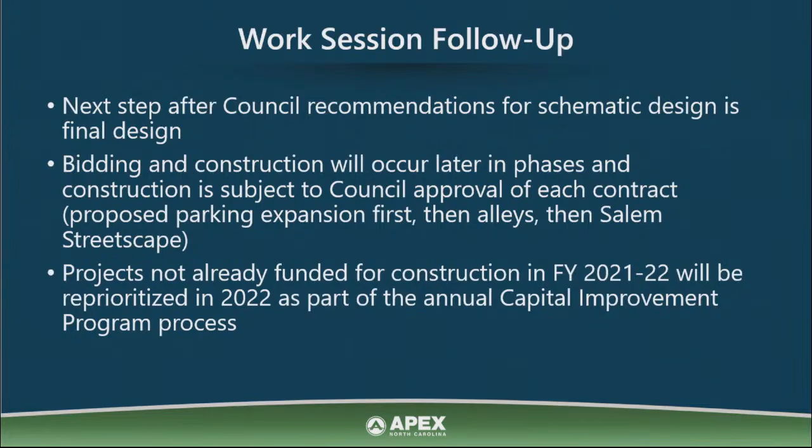Based on the town lots, the marked on-street spaces, and the alley upgrades, in total we're showing a net increase of 201 non-handicap accessible spaces and an increase in 13 handicap spaces with all of our plans.

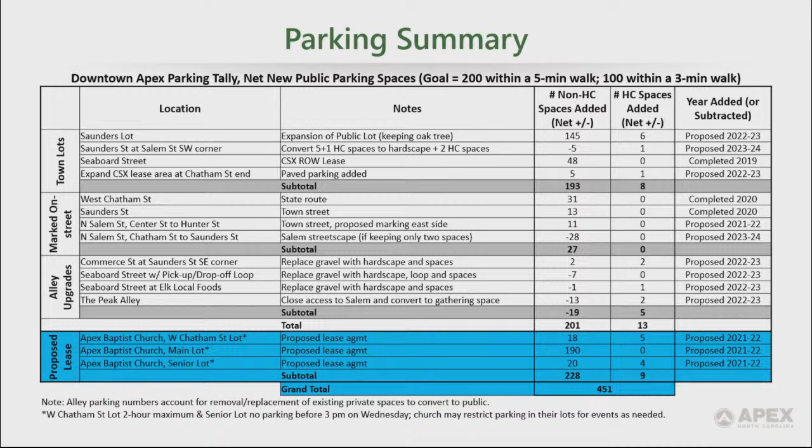At the bottom, I've highlighted a proposed lease with the Apex Baptist Church that is being discussed. The church has allowed public parking on their lots in the past, but they are not signed officially as a public lot, and we don't have a lease with the church. If we are able to establish a lease for some of their parking areas, we would be able to sign those as public parking with certain restrictions determined by the lease. So we're continuing to try to get that formalized as a signed public lot, but that is still in discussion.

There is a solar canopy that we looked at. We recommended excluding that from the project. However, there is a separate presentation tonight that will discuss the solar canopy because there were questions from council. We, as the design team, made that recommendation based on the information we had, looking at the cost within the scope of the downtown plan and what our priorities and goals were. If the information presented tonight to council makes sense as a larger goal for the town as a whole for this area, then that's something to take into consideration that would have been outside the scope of what we were looking at.

So I don't want it to look like staff is contradicting one group versus the other in terms of our recommendation. Commerce Street, we recommended proceeding with that.

Also recommended including the utility relocation underground, making sure the conduits are there for that. Seaboard Street, we recommended proceeding with that design and relocating utilities, providing those conduits.

We recommended a lease for compactors on Seaboard Street, but to be clear, we'd have compactors either way. We're just recommending exploring a lease option versus purchase.

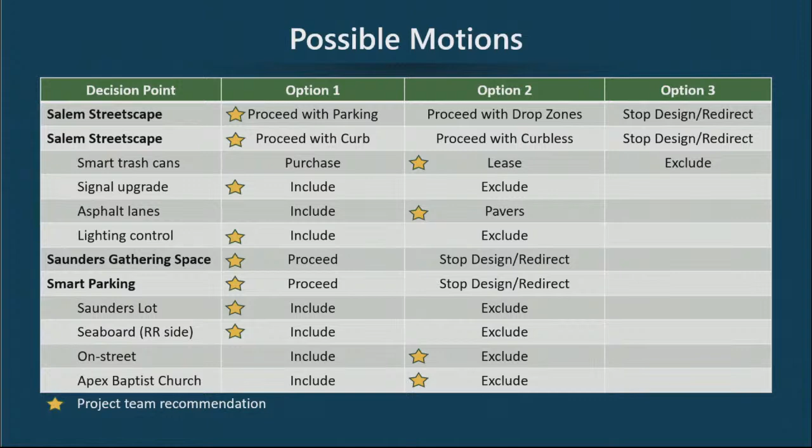As far as the smart parking goes, we recommended proceeding with that, including both the Saunders lot and the Seaboard Railroad strip of parking, but not including on-street spaces and not including the Baptist Church lease if that moves forward, in terms of the smart parking discussion.

So I'll go through the schematic designs really quickly. This is the list.

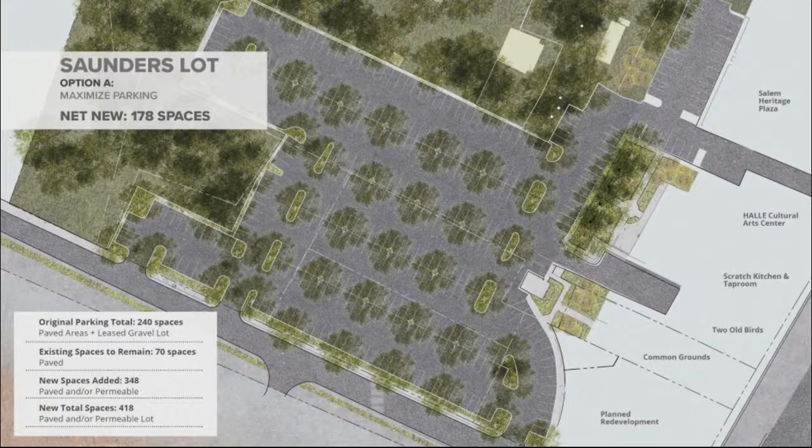First of all, we have two options for the Saunders lot, as you may remember. We showed you an option with a net new 178 spaces, and then that would be compared to an option that, as I've highlighted here, keeps the green space, the large oak tree. That would be 27 less net new spaces than in option A.

At the council work session, I believe there was a motion that may have been approved for the option with the green space, and that's fine if that's how you'd want to proceed. If you want to discuss that again tonight, we can discuss that again after the public hearing.

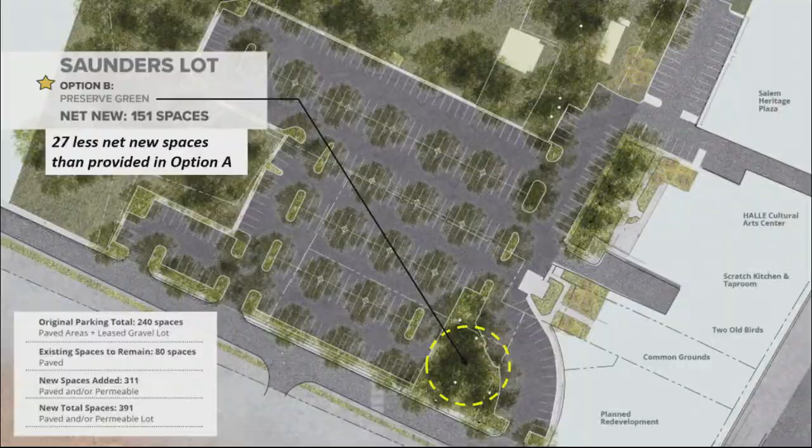As far as the recommendations go, the preserve green option is slightly cheaper than the maximized parking option. We are currently talking with property owners. There are two lots included in that parking expansion, so that's why we say cost to be determined, since that's under negotiation at this time.

The solar canopy has gone up in cost since the last quote we got. Steel has jumped up in price over the past month or so, so there's a new number on that. Steel could certainly go back down. There are a lot of factors in construction until you bid a project that can drive a project cost up or down. And there will be a presentation later to explain the return on that investment and other benefits of that solar canopy.

The original CIP allocation, just to recap, was $1.2 million for the parking expansion.

This also includes improvement of the pavement on Commerce Street and some drainage improvements as well. So it would require acquisition of right-of-way across the back of those businesses to be able to do those improvements on Commerce Street, and also acquisition for this improvement for parking and pedestrian hardscape in the area.

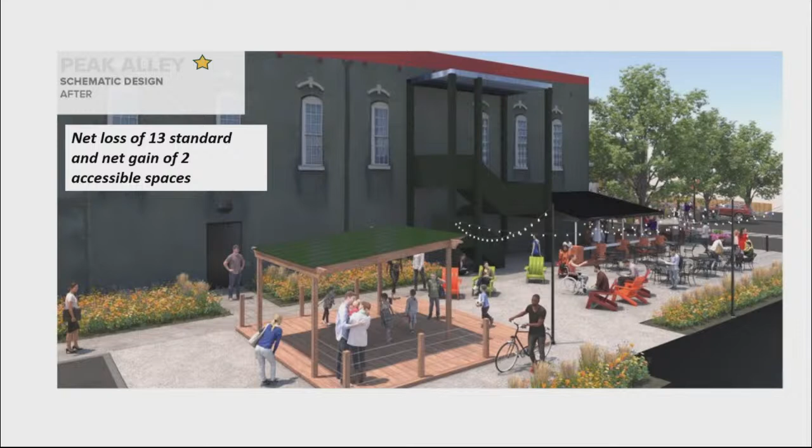There are 2 accessible spaces at the back side on the Seaboard side from this, which are just off the image. But you can see a small stage set up and areas for people to dine, and that would be the intent of this area. There is a net loss of 13 standard type spaces, but a net gain of 2 accessible spaces in that area. So that's the trade-off with this design.

Construction for Peak on Salem is $91,000, with about $44,000 in right-of-way and easements for that area. Again, that contributes to the grand total for the alleyways.

We also looked at an option that kept more of the parking spaces. Instead of just one pickup drop-off zone on each side of the street, this retains 10 out of the 30 spaces. We were able to keep the catenary lighting with some adjustments and adjust the street furniture layout. We lose 3 of the street trees with this, but we made sure to include at least one street tree on each side of the street in every case, so there's no gap—you've either got trees on both sides or one side with this parking arrangement. We didn't feel we could add back any more parking without taking away from the goals of the streetscape, but we feel this is a good balance to keeping some of the parking.

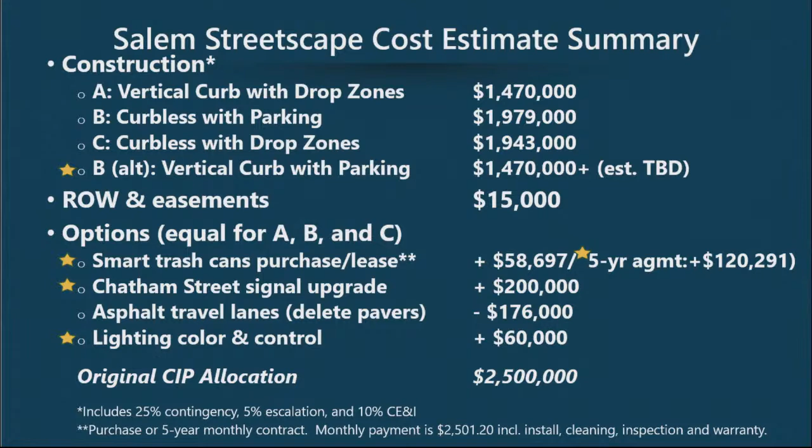We do recommend smart trash cans. We looked at purchase versus lease options—buying would add about $59,000, versus a 5-year agreement adding about $120,000 on top of our decorative cans, which would help with operation and maintenance by having a contractor handle a lot of that. Again, the Chatham Street signal upgrade adds $200,000. We recommend the pavers—good for both stormwater and aesthetics, and they have a calming effect on traffic. So we would not recommend asphalt lanes; we'd recommend the pavers and the lighting, color, and control I talked about. The original CIP allocation was $2.5 million, so we're doing a little better on our estimate here than we were on the alleys.

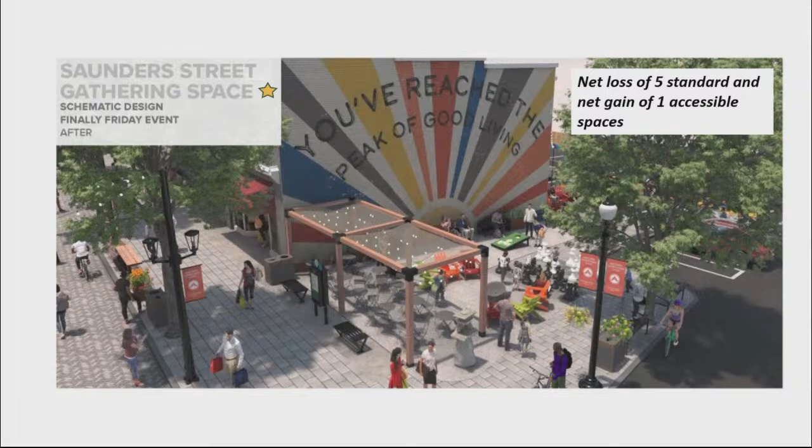This is the Saunders Street gathering space that we recommend. This shows taking the existing row of parking and the garden and trees there now, converting that to pedestrian hardscape, removing most of that parking but keeping 2 accessible spaces. That's a net loss of 5 standard spaces, but a gain of 1 extra accessible space. Construction of the Saunders gathering area would be $202,000. We don't anticipate significant cost in right-of-way easements with that since it's town property.

There wasn't a separate CIP allocation identified, so we would propose this to be an add-on to the Salem Streetscape. It could be constructed with Commerce Street, or it could come in with Seaboard Street. We'd have to figure out construction phasing and budget purposes, like where that fits.

Now onto smart parking. We do recommend smart parking for the Saunders and Seaboard with railroad side only. Smart parking is basically monitoring systems with cameras and loops. You can have a sign that tells you how many spaces are available, or have the information pushed to the cloud and an app to tell people coming downtown how many spaces are available. We don't think that makes sense for on-street spaces, but we do think it makes sense for off-street spaces if council decides to move forward with that.

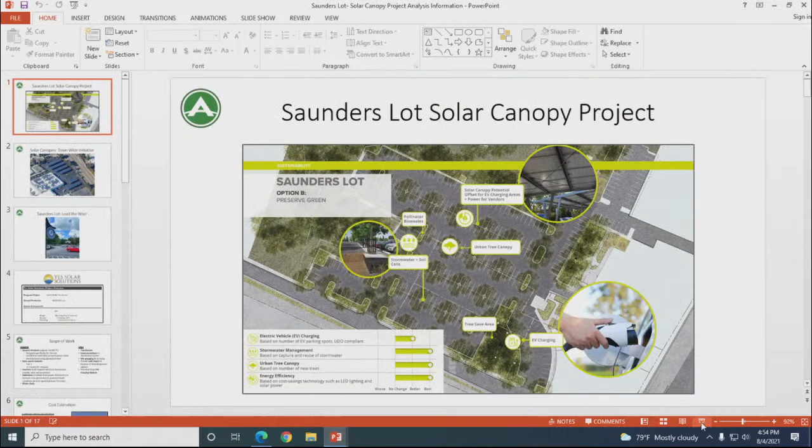So at this point, before we go into public comments, I want to turn it over to sustainability staff, and they're going to talk about our solar canopy. I will bring up that presentation. Thanks.

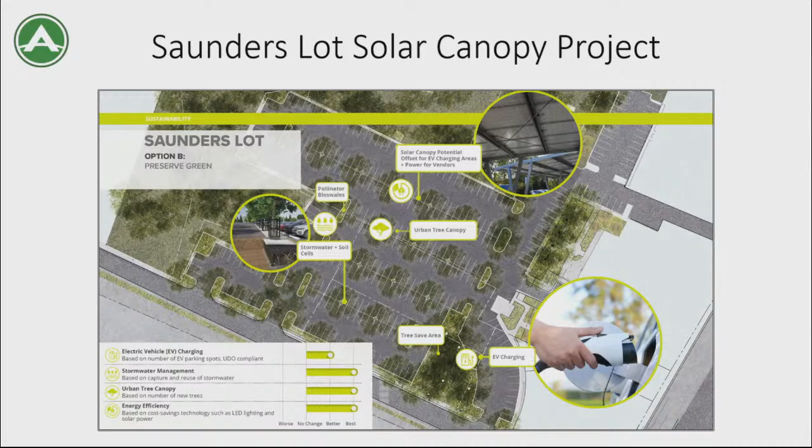Like I said, it's a townwide initiative, and the Saunders lot is a good opportunity to lead the way. It would be great because the public would benefit from it, since it provides shaded parking and helps reduce the heat island effect by creating shade.

This is one of the proposals that we've gotten, so this is where we're starting with the cost estimates. It would be a project that produces about 814,000 kilowatt hours per year, and that would be with 588 solar panels.

This is how we would maximize the benefit. It's a bit of a larger project because it's upwards of 500 panels, but we maximize the benefit that way, because the larger the project, the less expensive it is per unit, similar to buying in bulk, if that makes sense.

With the scope of the work that we would be getting with this, the vendor would be covering the cost of the carport structure, the solar panel modules, the inverters, the optimizers, and the shade study, all of which I can explain further as needed. The Apex electric team specifically would be responsible for the transformers, the interconnections to the distribution system, the site preparation, and the potential future EV charging stations.

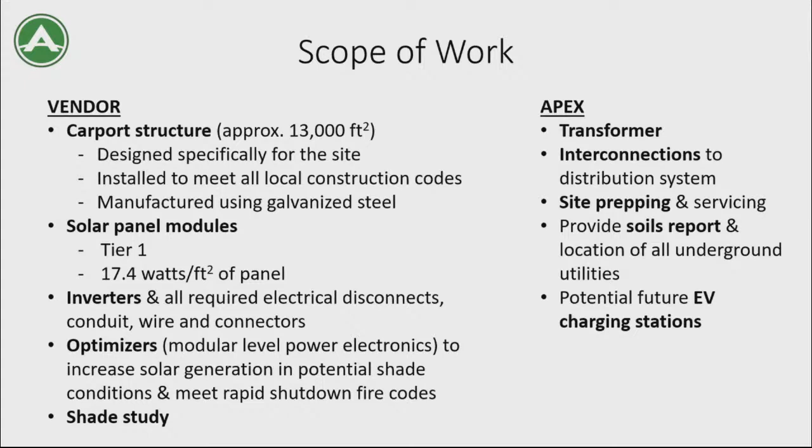These are more details on the cost estimation. Like was stated earlier, the estimate before was about $760,000. Now it's about $910,000, simply because there's a lot of fluctuation with steel prices right now. And this price also doesn't include the percent of contingency that is often included in projects.

There's also, with this cost, a warranty covering virtually all aspects of the project, including the steel structure itself, which has a warranty of 10 years, the solar panels, which would have a warranty of 25 years, and the inverter, which would have a warranty of about 10 to 12 years. That's not saying they need to be replaced in those times by any means, although solar panels do have a lifeline of about 25 years. But if something were to happen with them because of weather or similar events, then we would have a warranty on that.

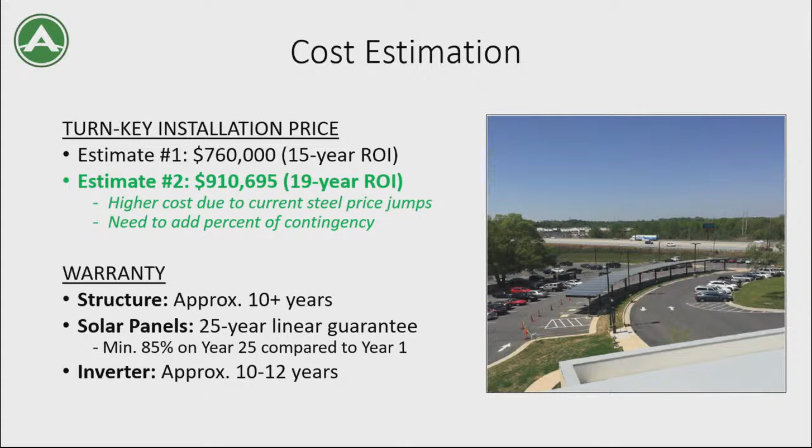Given the project and what kind of solar capacity we would be getting from it, we would have a total annual savings of about $50,000 with our energy costs.

Again, to people who aren't involved with solar, this is a bit overwhelming. It was to me at first, so I can explain that further as needed. But the big takeaway from this slide is that our total annual savings would be about $50,000 with this project. That makes the total payback about 19 years, since the project is about $930,000.

And that was calculated just given the 588 solar panels, peak demand, the price of our electric rates and things like that. So, in summary, the estimated cost is approximately $910,000, with savings of $50,000 every year on our electric, and the return on investment is about 19 years.

Some pros and cons: it is an added cost to the downtown design project, and there is the potential future use of another parking lot space down the road, because this is a 25-year investment. But the pros include shade for parking and events.

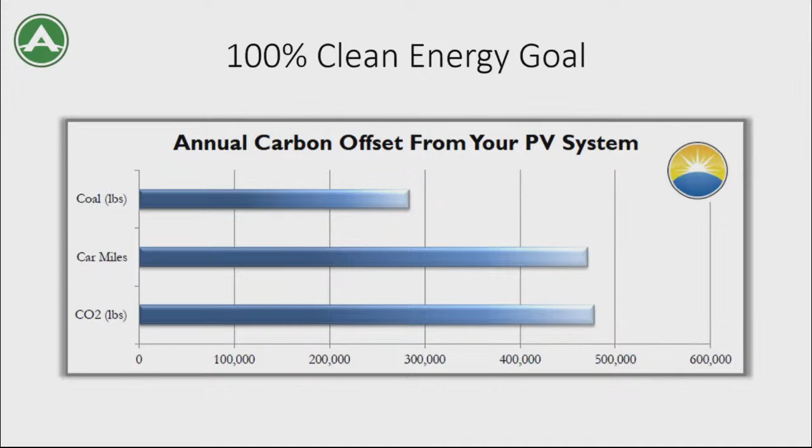This is a bar chart just kind of visualizing the annual carbon offset from the system. And more information: if about 1% of our energy resource is clean energy, then adding this proposed solar canopy is another 1% of our energy that will not be non-clean energy we're using. That is the same impact as planting 5,561 trees in Apex every year, if that's a better number to wrap your head around.

Additional considerations include funding for this. Megan and I, the sustainability program, would definitely look into other opportunities for funding, like grant resources. That would also be applied for research for EV charging infrastructure, and batteries for solar storage are optional and may be added in the future.

The summary, which I've gone over—I don't know if anyone has any, not questions, I guess, but in summary, that's the cost. Again, important to consider the steel price fluctuations and the grant opportunities we're considering here. The estimated annual savings gives a 19-year return on investment.

The future add-ons, the educational opportunities, and overall, the Apex Sustainability team recommends that we approve the solar canopy project because it's a big step to help meet the 100% clean energy goal. It's meeting the increasing demand for public EV infrastructure.

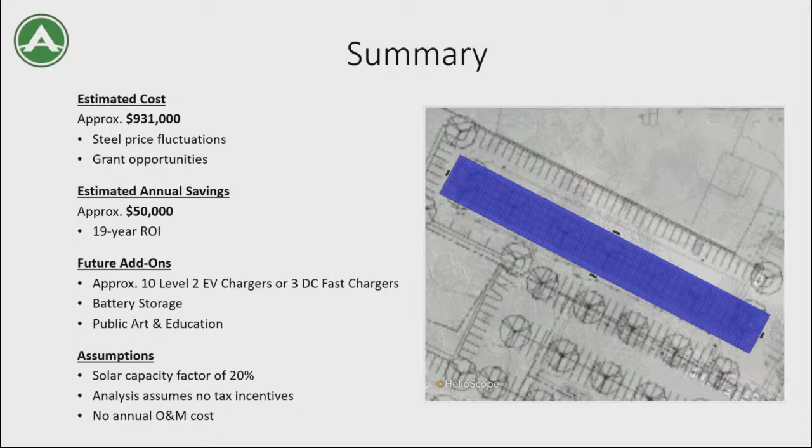And I would hope that a parking deck is further out than 10 or 15 years if we're going to spend all this money right now on this parking lot. If it's only 10 years out, let's do a deck right now, right? Well, that's just my question. It's important to be cognizant of long-range planning, because I think that's what we're all trying to do.

Yeah, and I had one other question. Part of the discussion last time concerned getting multiple bids from different vendors. Unless we still only have one bid here, are there not multiple vendors that provide this, and we're stuck with these guys, or what's the situation there? There are multiple vendors. Before moving fully with the project we'd have to send out an RFP anyway. The prices here are just from one vendor, and also from conversations we've had with our ElectriCities representative, if that makes sense.

Okay, so if I could paraphrase what you're saying: we'll do an RFP, and there will of course be multiple vendors and bids at that time. Yes. But we feel like this one bid is kind of representative of what we're going to see, because of steel prices or. Correct, correct. And when speaking with vendors, a lot of them aren't super willing to give out full prices on what they think a project would be, just because of the competition there. So these are the best numbers we could get based on what someone was willing to provide.

There was also conversation last time about where the power from this would go. Has there been more discussion with staff on that? Yes. So if there are future EV chargers, then the solar canopy would be providing the energy for those. Otherwise, it would go back to the grid, the town electric grid. If that answers your question.

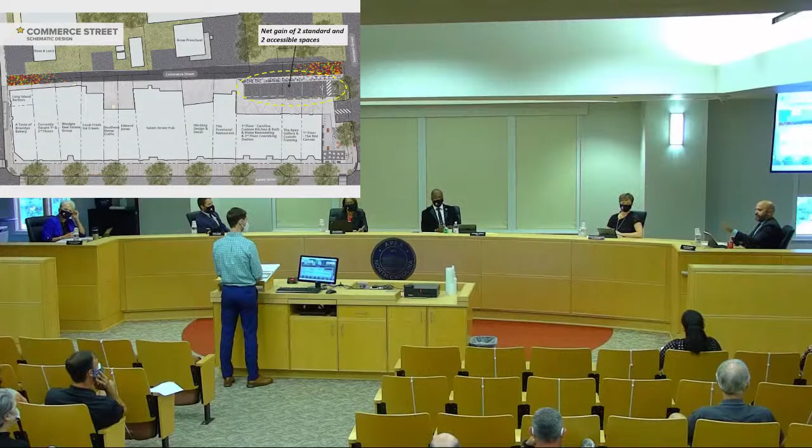That's what this meeting is, to say we're starting this process now. After this is when all the acquisition happens. So just recognize, I think you had a page earlier that showed 5 phases, and we're at the end of phase 1.

We did the study, now we're doing phase 2 where we're actually starting the thing. There's going to be a lot more of these meetings, I would think. The decisions we make tonight probably realistically aren't going to be 100% exactly what happens, because stuff will come up in design, stuff will come up in implementation. We'll have to come back and make changes, that's what happens. So we're at the very start of this, and I ask everyone to keep that in mind.

And I think that comes down to some of the details too. I feel like some of the discussions we're having and the questions we're asking, they speak to what the next step is going to be. Like, we're going to do final design where we narrow down all the details. So it's okay to not know exactly where a trash compactor is going to go. We need to, the purpose tonight is to get something down on paper officially, as this is where we want to go as a town.

And I also want to speak to the zone parking thing, and I just want to echo what our lawyer said. We're a public entity, we're in the business of building public parking spots. Saying there should be zone parking means we shouldn't build a lot there, and the business or the owner that wants to do zone parking can buy the lot and do zone parking. I don't think we can do zone parking.

That's my opinion. And I would just like Ms. Hoey to investigate that and report back and give us more information. And it doesn't sound like she's prepared to do that tonight, so. I would say, I think we've done a lot of investigation, and we need to get something done on paper tonight. And if something comes up during the investigation, we got to switch plans. We got years before, we got at least 2 years before a shovel hits the pavement.

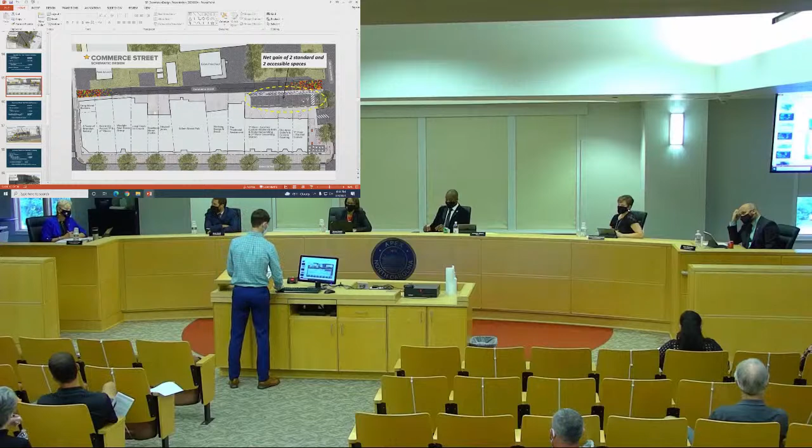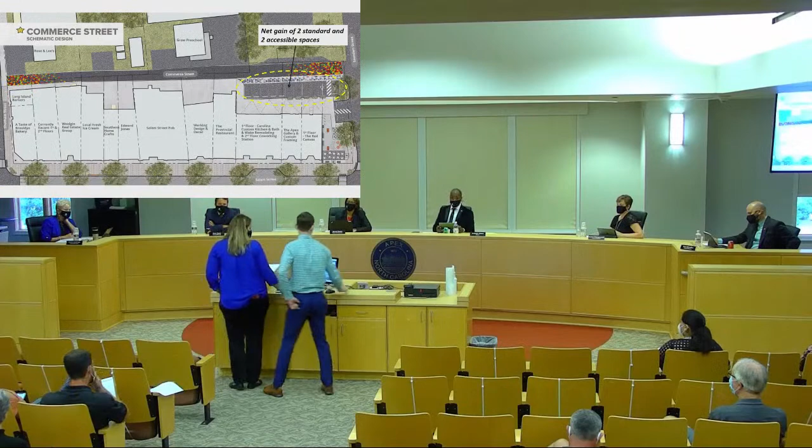Do you have an estimate of how many parking spaces that is for the owners that wouldn't be touched? Are you trying to? Sure. Okay, so I'm just going to use pointers here. So you're referring to like the areas behind these buildings?

Each of these, like for certain businesses like Edward Jones, Southern Home Crafts, these are like about 1 parking space per tenant that typically parks there. Salem Street Pub parks directly behind, they have a compact space, their dumpsters and stuff like that, so actually they park on this side. Grow Preschool has their parking lot to this side, we just don't indicate it. Those are all private spaces and they stay.

And there is space, we have this pull-off area here that is currently used for people to load and for truck deliveries, and all of that still stays, but it designates that space more officially, because you have a 20-foot drop here down to 15. So there are truck parking areas for loading and unloading behind Commerce Street. This is one of the reasons for the utility cleanup, because a lot of times we have trucks that come through this area when they're doing their deliveries, and those lines are pretty low and they take those out.

But all of these, with the exception of this end here, all of the existing parking spaces behind these businesses, like Werking Design Decor, have about 2 parking spaces. Provincial uses their rear, which isn't really indicated here if we had an aerial view. They have their garbage storage completely behind their building, so there actually is no parking there, it's just used for storage. So it all depends on each individual business, but all of those existing spaces where these people park, that all stays. Thank you.

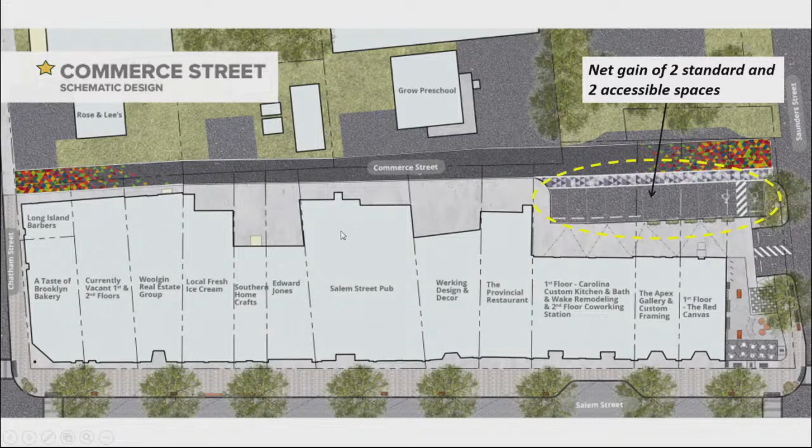Other questions or discussion? We have a motion and a second to proceed. Are we ready to vote? All right, all in favor indicate by saying aye. Aye. All opposed, no. All right, that passed unanimously.

And so the option to that was relocating utilities. Was relocating utilities part of that motion? Yes, that's correct. Okay, yes, excellent. So I will check that off.

So on Seaboard Street, our recommendation was to proceed with that design with the loop and the parking arrangement that we show as part of that. So again, I'm going to come back and ask the same kinds of questions. Okay.

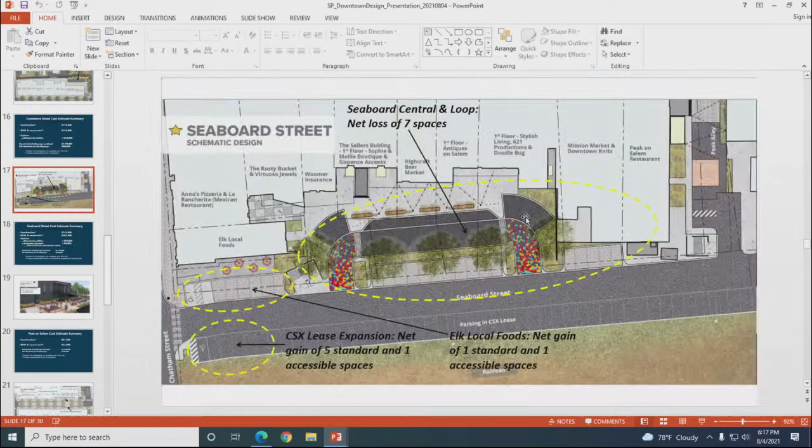I was appreciative of your clarification on the Commerce area, because a good amount of those private spaces stay. But what about here on this design?

This is a much more convoluted issue, because the way they park cars isn't indicated in this space. For instance, Woomer Insurance stacks cars since it's all employee parking. Mr. Woomer would tell you he could probably park 6 to 8 cars back there depending on how he stacks them, because people can jigger in and out, and you can ask people to move and back out. There's also a loop that was created here, and Stantec can talk to this too. This is an unofficial sort of loop that's actually used on a regular basis within that gravel space back there.

Highcraft Beer Market already has sort of a temporary area they use behind their space that they don't officially park in, but it depends on the day, so it changes. Stylish Living and Productions, I believe, would say they probably have about 6 to 8 spaces that they have back there, for the 3 businesses that are there.

As far as behind Mission Market, currently what's used there is for the surveyors. There's a survey business in there, and they use it to park all of their survey trucks. So that's where those acquisitions would come from. It's a hard estimate.

Some people mentioned they don't currently have great access from the rear of their property. Those are design things that potentially, whether through the downtown facade program or other programs, we might be able to help address in a future development, addressing some of the issues brought up today.

You mean helping them with access in the back of their stores?

Yes. And to answer the question again about the loss of spaces—all this infrastructure along the backs of these businesses shown here would all be intended to be public acquisition. So the question then would be, how do we manage that? Can we do zone parking? Is there a certain time of day restriction or hourly restriction we would put on those spaces?

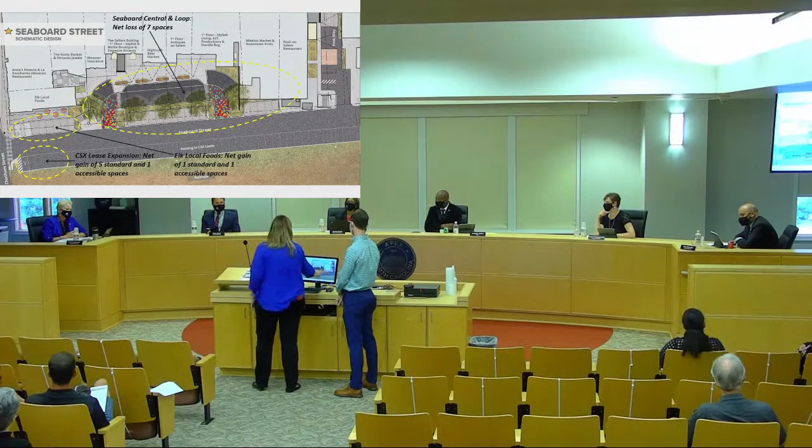In this design, there are two compactors. Unlike on the Commerce Street side, you get consolidated bookends, which is nice, and it also helps because you've got restaurants that essentially bookend that side of the street too. One of the issues on Commerce Street was taking trash from the middle of the center and dragging it up and down. That doesn't really happen the same way here, and it consolidates them in a much nicer way. Because they're compactors, it will hopefully reduce the amount of smell back there.

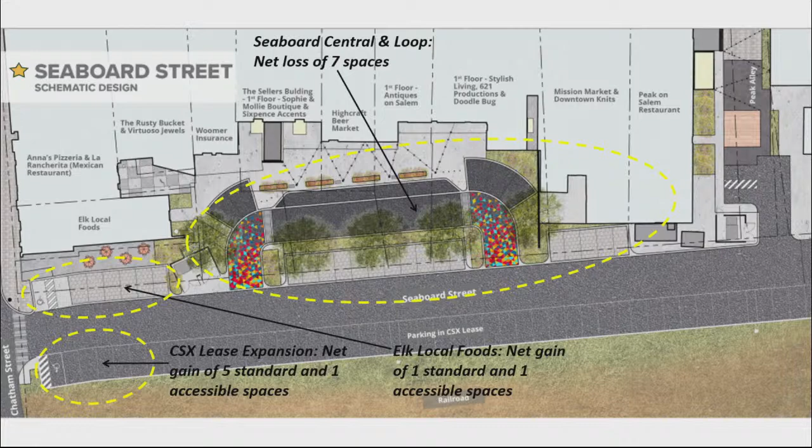I have a question about this, something we discussed when we were walking that area. Is there a possibility of making Seaboard Street a one-way street and adding more parking back there if we do that?

It's difficult to answer that. I would say it would be difficult to add much more parking back there or make it a one-way street, because you can only make it so narrow. My understanding is the fire department circles in off Chatham Street to come around that way, so that would be the direction of flow heading north. I'm not sure exactly how you'd add spaces—you'd have to do quite a bit of reconfiguration, and per fire code you're not supposed to go below 20 feet of clear roadway. So if it's at least 20 feet there today, we'd want to retain that, and I think it's a little bit wider than shown here.

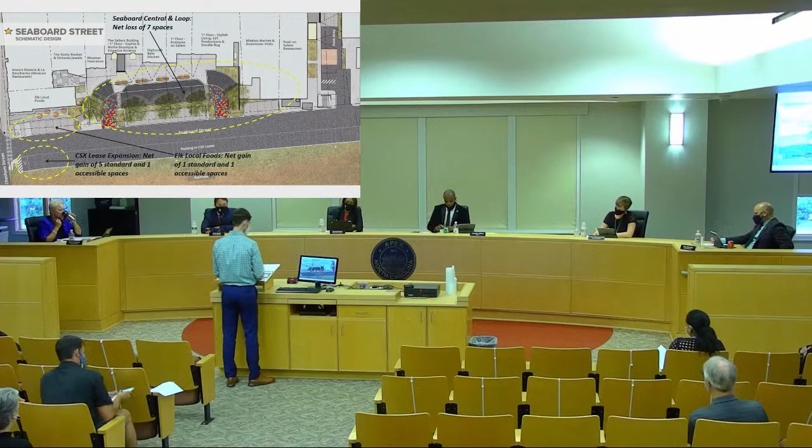The next item is the Peak on Salem Alley. I'll show that image. So again, this is the image.

This formally cuts off vehicle access to the alley from Salem Street. There would still be alley access to the two accessible spaces we'd be adding on the back side, on the Seaboard Street side, providing an area where we show a stage here, which we'd anticipate being a private effort. We would create a pedestrian-oriented space to facilitate that, with landscaping and pedestrian easements through the area to allow a gathering space.

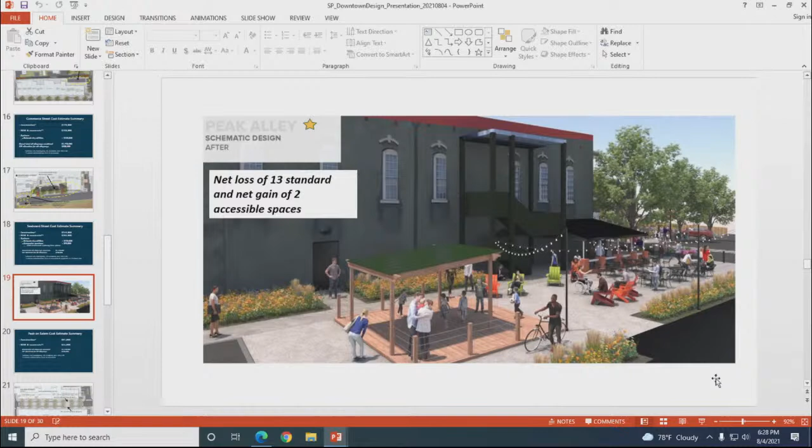Further questions? One of the comments was related to noise for the residential area when you add the stage. Can you talk about that? Yes, we would not be proposing to add the stage as part of the project. We'd anticipate that being a proposal from a private business. As part of that application, if they want to move forward with that, we'd certainly consider it, and the planning department has certain regulations they'd have to follow.

I think the noise complaint is a legitimate concern that could be addressed with some screening elements or other things, if that is proposed.

So what are we really doing here? Just acquiring the property and making it a public space for business to improve later?

We would anticipate keeping, since it's not officially parking, staff would propose to obtain easements through this area, making sure we have all the utility easements and pedestrian access easements we need. But most of it we would propose to keep as private property if possible, since most of it would be available for public and private use as a pedestrian space.

We'll have to talk through those details as we get into the final designs and nail this down. There's a conversation that has to happen between final designs and the property exhibits and appraisals we have to do to figure out what we need to acquire. Sometimes those conversations help us figure out what the town actually needs before we go to the business owners.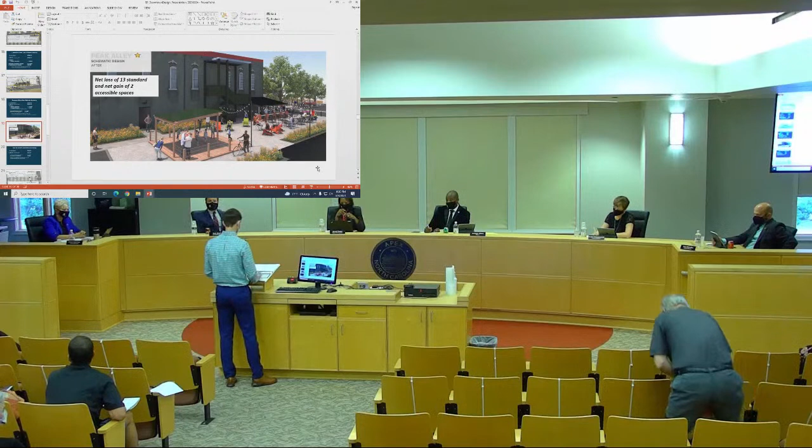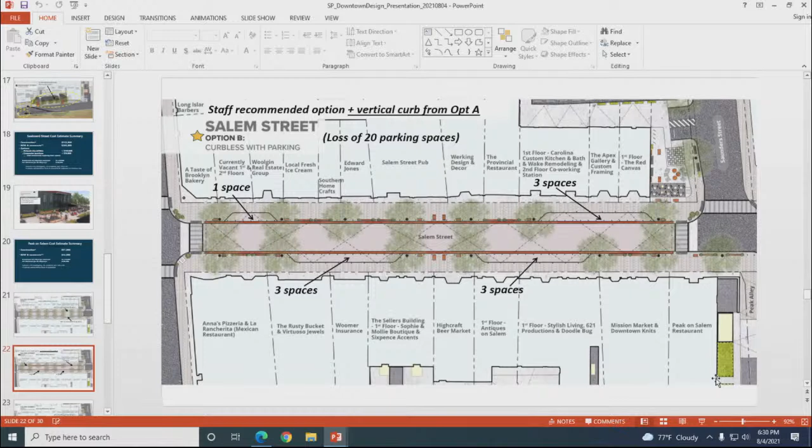We'll move on to the next one, the Salem Streetscape. There are a number of options with this, but to refresh: option A had pickup drop-off space on each side of the street with curb. Option B was curbless with parking. We recommend the 10 parking spaces, but also recommend retaining vertical curb, so it's an alternative variation on option B. Then there's also option C, curbless with a drop zone on each side of the street.

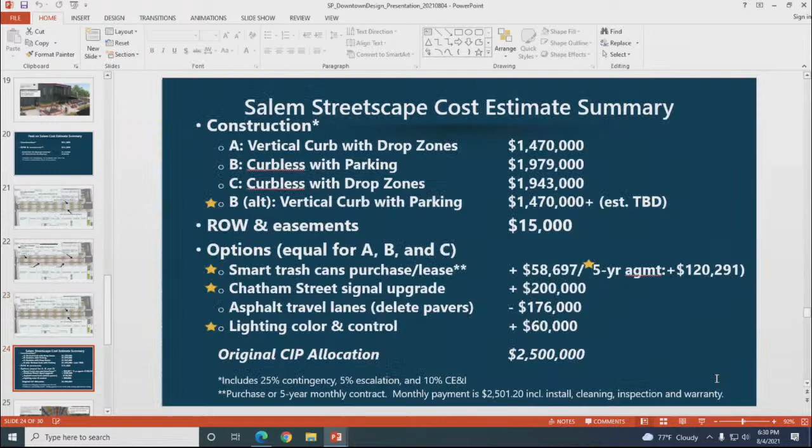The other issues we looked at with that motion included a lease of smart trash cans, the signal pole upgrade at Chatham Street, pavers in the design as shown in the rendering and animation, and lighting control for the catenary lighting across Salem Street. Could you refresh us about the smart trash cans?

Smart trash cans. Colleen wants to talk about smart trash cans, so I'll let her do that. Maybe I need one at home.

They're solar, and they have a little key fob you can scan. They're a compactor, a mini compactor, and they have two options.

You can have recycling. They're very specific, so you don't get a lot of errant trash that doesn't fit, it really is truly litter. Some of the issues with public trash cans is that people try and put things that aren't really public trash in public trash cans. So this would negate that.

Plus, because they're compactors, they allow for a larger amount of waste and reduce the number of pickups. And because they're enclosed, just like on a larger scale, they reduce smell as well. So there are certain benefits to smart trash cans.

And because they're smart, there's an app. So our street workers would get a notification when the trash can was full, so they'd know when to go back. The cool thing about the key fob is once it's full, you go back with the key fob, compact the trash, and you may even get a little more time between pickups. It also notifies you when your trash is ready to be picked up, so there are some nice benefits.

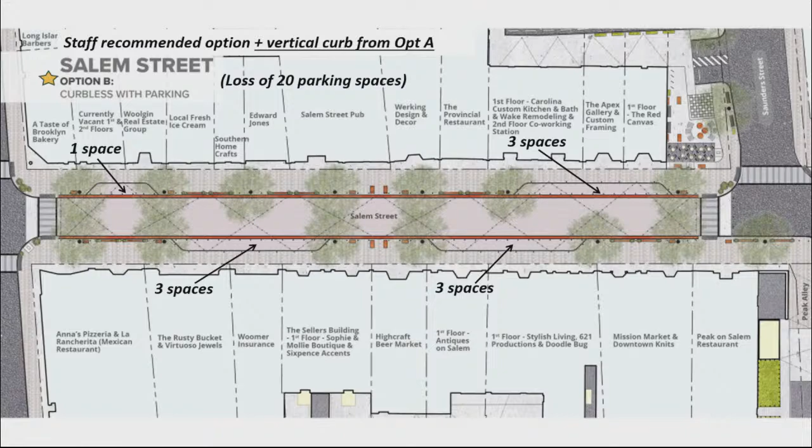So based on this plan, I'd put the question back and ask, where would someone propose we add those spaces back? Our concern is that we've reached our maximum based on what we're trying to achieve with the streetscape, trying to keep as many trees as possible, trying to keep it not completely symmetrical, but at least where you've got a gap on one side, there's a tree on the other, and not taking away too much of the wide sidewalk in areas where we think we need it.

Mayor Pro Tem, I did this exercise and tried to create this puzzle, and I couldn't do it better than this. I'd also note that we have a fudge and ice cream shop coming in that's going to be less utilized because it's going to have parking in front of it. So things have already changed from this design to make it less desirable to have parking in front of that location. But I didn't see, at least with the current tenants, that you're knocking out anybody's sidewalk. I think you'd want it done some other way. So that's what I came to conclude. Thank you.

So I think there's another discussion about curb versus curbless. I know you're recommending the curb, but one of the things I really want to advocate for is the curbless design, mainly because it makes it more seamless and more inviting, from what I've seen with those designs before. It also makes it more accessible for people who have difficulty navigating steps and curbs. So I would recommend option B, keeping those 10 parking spaces and having that curbless design with bollards.

Okay, I guess I'll make the motion for option C. Second. All right, motion and second. Can we go back and look at option C for a second, please? So option C is just no parking, just 2 drop zones, right? No on-street parking, right? Correct.

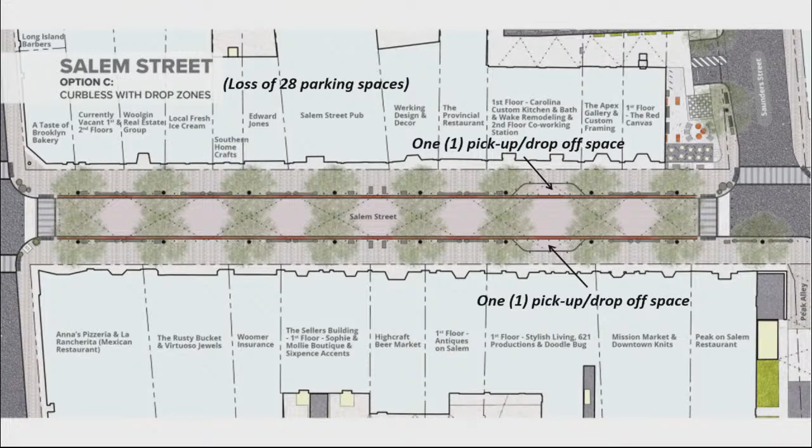Discussion, anyone? We mentioned things changing, and I think the comment was about a lot more restaurants and bars. I think that will be the reality, and this will future-proof us more for what I think is actually going to come regardless of what we do on this vote. They will be more successful if it's like this versus with narrower sidewalks. That will knock out a lot of the places where maybe a different kind of business that could utilize this would want to go. I think there's a future to this that we need to acknowledge, that it's going to become more of an entertainment district, and that's what the downtown plan talked about. So I think this is what the future is here.

Okay, further discussion? I think we have repeatedly heard from our retail businesses that they're concerned about drop-off and their customer base. If we take away parking completely from Salem Street, I'm going to oppose this. I would agree, I'm going to oppose this as well, because I think it's important to have some on-street parking.

Okay, ready to vote? All in favor say aye. Aye. Opposed, no? No. You, no? No. Okay, motion fails 2-3.

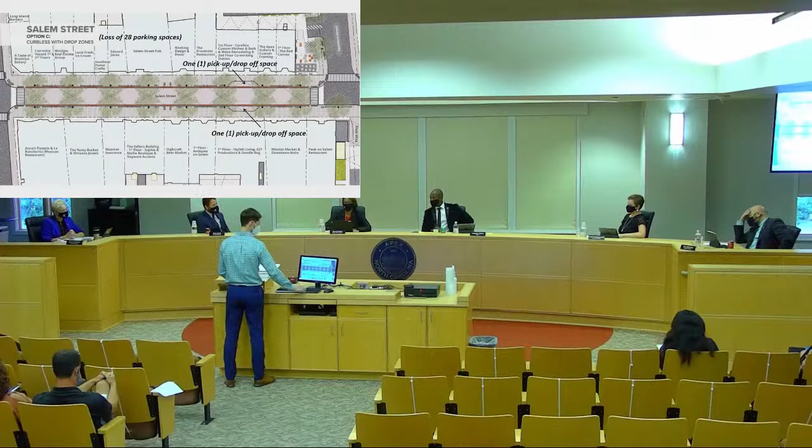I was clear that I made a different decision related to the tree, which would give us a few more spaces. So that was where I was, and that's where I am. It sounds like I made it really clear earlier that I changed my mind related to removing the tree to get the spaces based on what I've heard, which gives me heartburn to do, but that's where I am. And so that wasn't an option because we did not approve that.

It sounds like that vote was getting rid of 3 trees just now. No, that's not what I'm saying. What I'm saying is I want more spaces. And so the vote that you and I were on related to that, we changed, right? And we took the pause on, I asked for it, which would have given us more spaces in the other plan.

So do you want to offer a modified option B motion? I don't know if I do. I need more parking. So I said what I wanted to do earlier.

And I think you were asking for one more on each side, 12. Is that what you... or I asked, could we get to 12? That was my question.

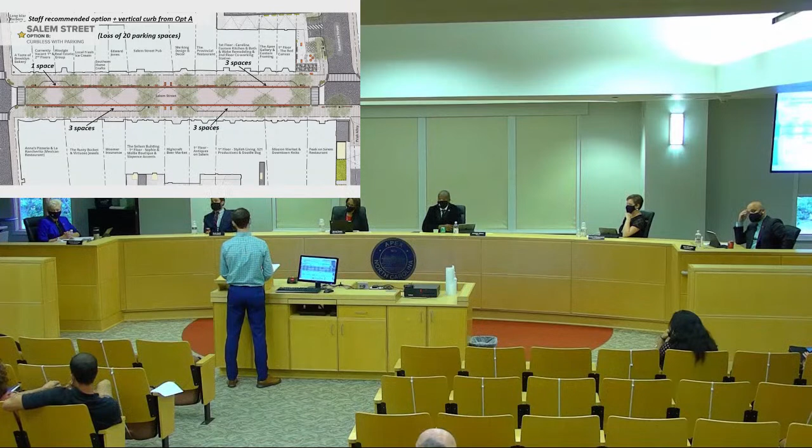Staff, what does that look like? Can I request that we have a short break so we can discuss and consult? How much time do you need? 10 minutes, please. All right, 15. All right, take a 15-minute break.

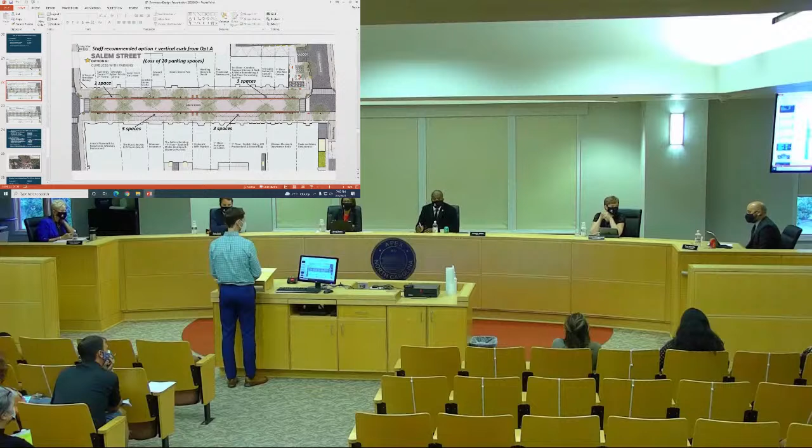So let me just say, in support of my motion to reconsider, I want to get something done tonight. I'm uncomfortable with redesigning this on the fly. I'm uncomfortable with approving an option that the public hasn't seen, that hasn't gone through this process. We spent months and months, years on this. So I want to move forward with something tonight that's been presented, discussed, and commented on. If it's not my preferred option, I'll go with my second preferred option.

Thank you, Councilman. Are you willing to reconsider the other vote related to removing the tree, which gives the spaces, and I'd be fine with this?

No. Okay, well, we discussed that, this is our final, and it's the same thing related to the tree — things could change, but that's what I'm telling you: I would prefer to have a less passive use and remove the tree and have an active use. And if something changes and we can keep the tree, that's fine. But that's where I am. I'm asking for my colleagues to consider that. That's where I am in negotiating this.

Okay, anyone else? Okay, just for clarification, Mayor Pro Tem, you're talking about the center part? No, I'm speaking of — do you want to show them the original one where it was 3-2 on the removal of the large tree that was a passive use?

So if we're removing that tree, which just has a passive use, it's not going to be a gathering area, to have active use of parking close to this, then I'm okay with this. That's what I'm asking.

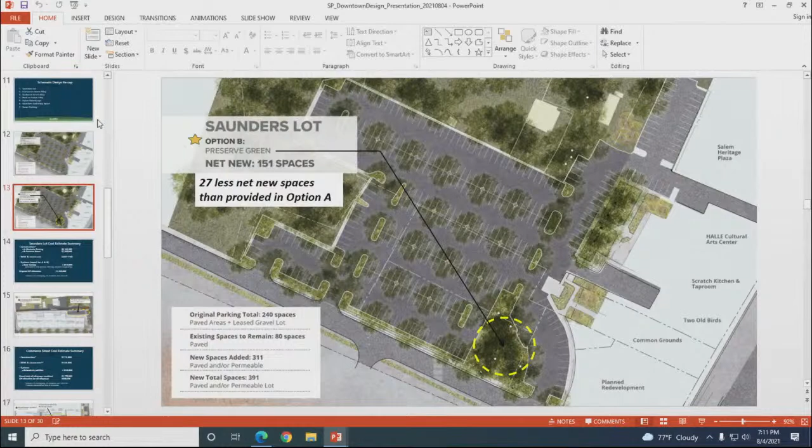So to clarify again, what you're saying is you prefer reconsideration of the vote for option B for the Saunders Street parking in favor of option A for the Saunders Street parking, in addition to recommendation for the 10 on-street spaces for Salem Street. Yeah, I would just go with the 10 if I can get these.

Oh, I see, I'm glad you clarified that. So you want to go back to A for that? I want to know — if I vote for this, will you go back to that? That's all, and then we're done. I would consider that, yes.

I'd point out, Mr. Mayor, these are two separate motions, so we can have two votes on them. I think we need two votes, two reconsideration votes, if that's what you're asking. Okay, anyone else?

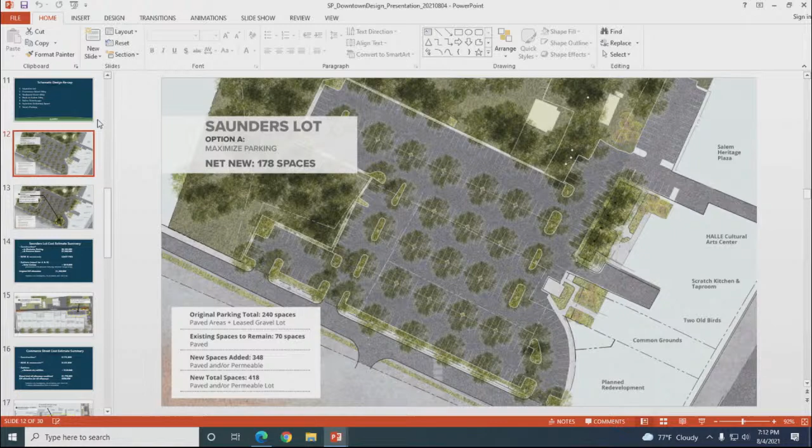So right now we have a motion on the floor, Councilman Mahaffey, on option B with 10 spaces. I'll second that motion. Okay, we got a second, we'll go with Stallings on the second. All right, take a vote. All in favor, say aye. Aye. Is that 3? Okay.

Opposed, no? No. I voted with them for that. Okay, because I'm asking for this other. Okay. All right, so motion carries 4-1.

So, Mr. Mayor, I'd like to reconsider the vote on the Saunders lot. Yes, Mayor, so that was the vote to reconsider — which means you'll take up the vote again with regards to option B. That's right. Got it, okay, sorry, got you. Okay, so now we have a motion on the floor for option B again.

All right, thank you for the correction. All right, motion on the floor for option B. You made the motion — I think the motion approving the previous vote made the motion, essentially. It's back on the floor, so we just vote or discuss more. Any further discussion? So we don't need to make a motion for the option? Just vote — okay, we just vote, okay.

So we're voting on option B, 10 spaces downtown, right? Okay, yes. Yeah, I just want to know if there's more discussion before we vote again. All right, all in favor, say aye. Aye. Opposed, no. No. All right, 4-1.

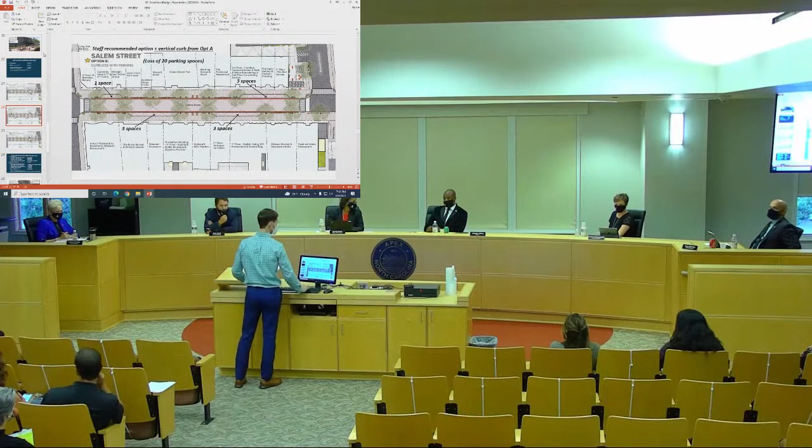Now I would like to vote to reconsider for the Saunders lot. Okay, second. Okay, motion and second. Further discussion? We're talking how many parking spaces again? 27. 27, okay.

So again, this is the vote to have the vote. Mm-hmm, right. All right, all in favor, say aye. Aye. Aye. Opposed, no. All right, passed unanimously. All right, any other discussion?

So my thought on the tree was, if it is old and stressed, we can redesign and add those parking spots when it dies. We're not cutting it down today. It's got maybe 5 years left, so let's see where it goes and add the spaces at that point. I'm not proposing we permanently keep the green space, just that we keep what was there for the time it had left.

And I agree the tree does look stressed. I'm not an expert, but looking at it, it's certainly not a sapling. Have we had any input from any tree specialist about the tree, other than to say it's stressed?

Not recently to my knowledge, but maybe Shannon may know more from past efforts. I don't know if we know anything. We've had money in our budget for a decade trying to keep that thing alive, so I'd say it's on its last legs.

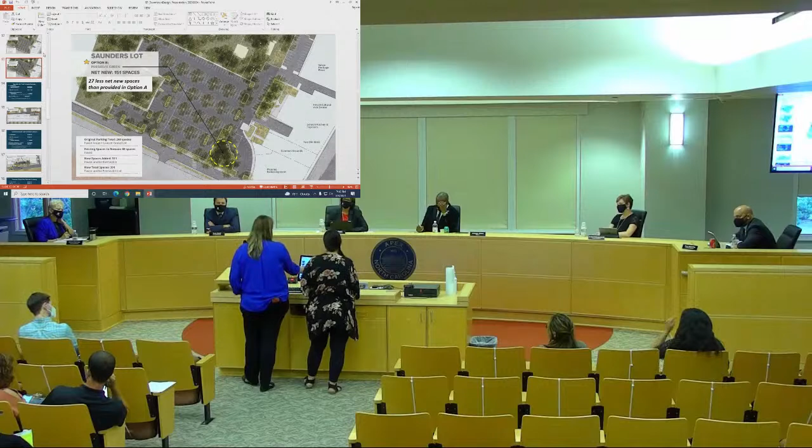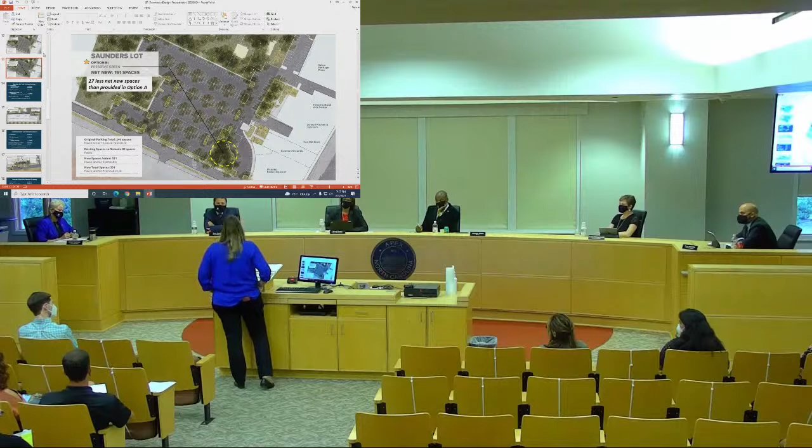But as far as the trees go, I recently had a meeting down at the Ambassador Garden with town staff and our arborist, and it's in really bad shape. That tree, along with the two trees in the Ambassador Garden, are both highly stressed based on the urban environment. They're too contained where they are and don't have any more space. So honestly, it'd be a good public art project to take the oak tree and turn it into something else. But that's just my opinion.

Has the arborist given any information about the lifespan or prognosis of the tree? Without significant aeration and other things you'd need to do to keep that tree alive in its current environment, you're not going to be able to sustain it for too much longer. It would require a lot of money, as Diane pointed out, because you have to deal with acid rain, atmosphere issues, and similar problems. These trees just don't have a long-term lifespan in this environment, with all the parking and carbon and stuff.

So we could keep it alive, but it probably wouldn't be worth it—it would cost more money than it would be worthwhile, I guess, when you consider it against 27 parking spaces.

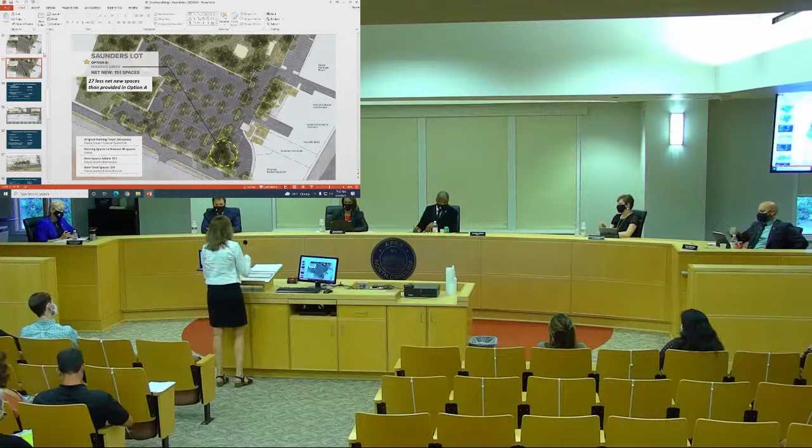And I do need to clarify: what it helps with for stormwater is reducing new impervious surface, so that's part of the stormwater calculation, impervious versus pervious. It's also expected that there would be additional impacts to that tree from the grading that has to be done for the parking lot overall. So just two things to think about—more negative impact to the tree with the proposed renovations to the parking space.

Okay, all right, we got a motion and a second on reconsideration. No, we already voted. Yeah, it's reconsidered, it's time to vote. That one passed, it's time to vote.

Yeah, okay, so I need to be clear on what my motion is now. That's what I'm at. Okay, go for it. So my motion would be to adopt the plan, option A, that has the additional spaces—27 spaces. There we go.

Mayor, just to be technical, you already have a motion before the council that you've gone back to, which is to preserve the green areas. So there's a vote that needs to be taken on that. If that fails, then a second motion could be made to go with the other plan. Got it—for the Saunders Street lot. Okay.

Ready? So I need to make a motion to deny. We just need to take a vote, right now. There just needs to be a vote on the green plan.

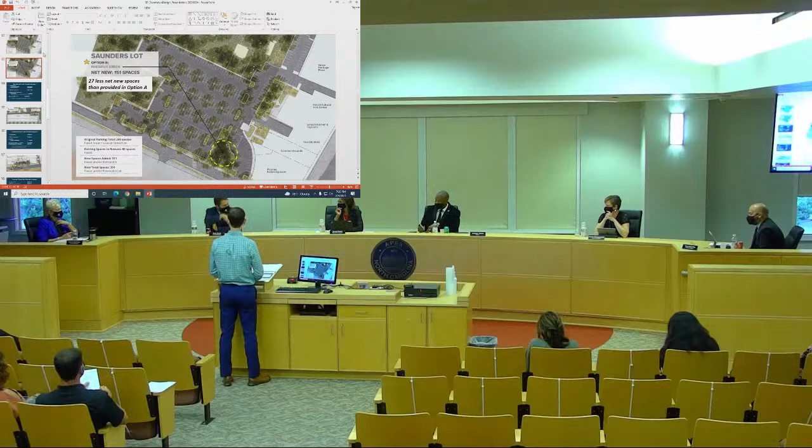Just to be clear, all right, here we go. All in favor, say aye. Aye. Opposed, no. No. Sorry, I got 3 and 2, right? 1, 2, who was the third? Aye. Well, that's 3. Okay, so I was a no vote, you're a no.

Yes. Let's do it again. All in favor, say aye. Aye. Opposed, no. No. All right, motion fails 2 to 3.

All right. So now my motion is to adopt, for the Saunders lot, option A. Second. Okay, motion seconded.

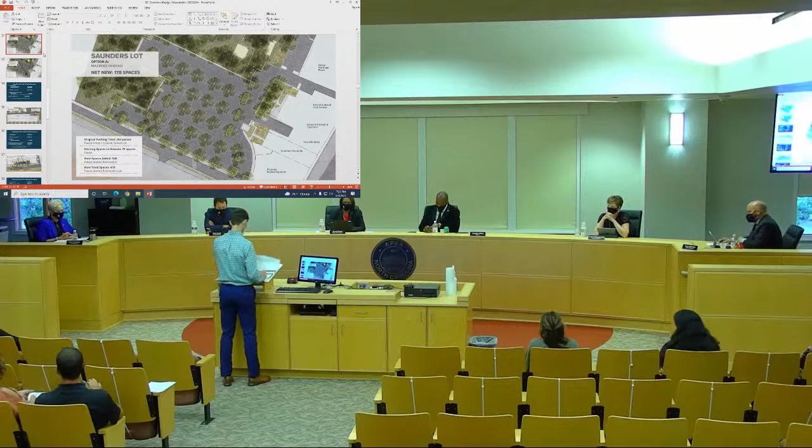Discussion. All in favor, say aye. Aye, 3 ayes. Opposed, no. No. All right, motion passes 3-2. Thank you, Councilmember Kittner, I appreciate it. Good job, everyone.

So we're back to the streetscape. We have some individual items: smart trash cans, a signal upgrade, pavers instead of asphalt lanes, and lighting controls. You can decide if you want to take these as a group or individually, or we can just go down the list.

Any preference? I'll make a motion for all 4 of those recommendations. Second that. I got a motion and second for all 4 recommendations, as presented by staff. Mm-hmm, yes.

Should we at least describe generally what they are before we vote? I heard smart trash cans for one. Yep, that's the smart trash cans. It's including smart trash cans in the budget, which we talked about the lease option, which adds about $120,000 to the budget for a 5-year lease on those smart trash cans. The signal upgrade is about $200,000 for what we estimated to do decorative poles to replace the existing wood poles.

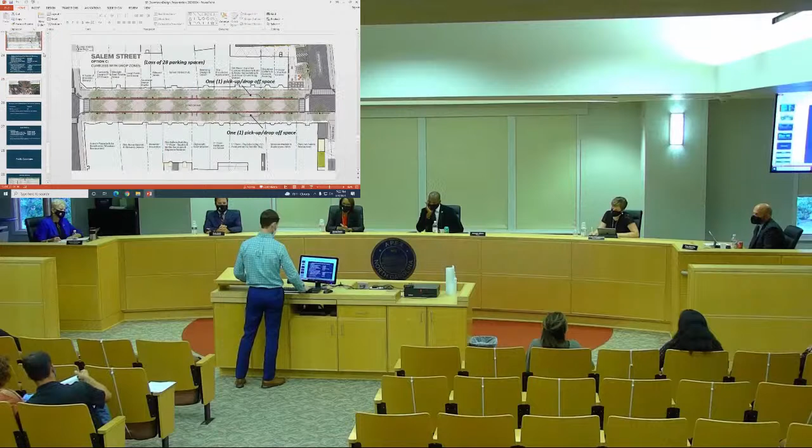The asphalt lanes, pavers instead of asphalt lanes, cost a little bit more money. Let me go back to that slide. Asphalt lanes, if we did that, would take about $176,000 out of the budget, but the pavers provide a stormwater benefit as well as an appearance and traffic calming benefit. And then finally, the lighting color and control adds $60,000 to the budget, but it's a nice amenity to use for events downtown.

Any other questions? Could you speak to the lighting a little bit more, Mr. Dalton? Colleen would love to talk about lighting, so I'll turn it over to her. So this is for the catenary lighting that would be over North Salem Street. Essentially what this does is allow us, similar to what we've already adopted and approved with lighting control on the water towers, to do that same thing.

So we'd be able to change it for different festivals, whether that's Go Pink for breast cancer awareness, or for Pride Month with rainbow colors, or celebrating Christmas with red and green. It allows us to control those things, and we would have a setup schedule the way we do with electric utilities. Essentially, this is software priced with the same system that's already being done, so there's already redundancy in the system.

They're all LED, but RGB LEDs, so they can do all different kinds of colors, and can even chase each other if they wanted to. So some fun stuff, light it up like a runway. But it's only the North Salem Street lighting that has that control. The other areas with catenary lighting are just the warm white, standard warm white.

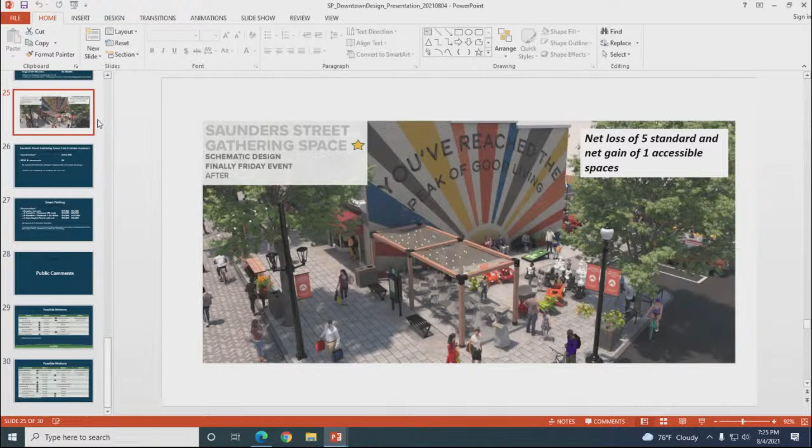I'll make a motion to approve, as recommended by staff. Okay, I second it. Stallings, is there a way to incorporate the library in there? Yes, absolutely. All right, all in favor say aye. Aye. Opposed, no. Passed unanimously.

The next item we have on the list is smart parking. We do recommend proceeding with that. There are various options, and if you do want to proceed with smart parking, we recommend including the Saunders lot and also the Seaboard Railroad Street side. Those are the cost ranges we'd recommend, somewhere between $31,000 and $60,000. I know that's a big range, but there are a lot of different products out there and technology is constantly changing. Once we get into it, we'll have a better idea of exactly what elements we plan to include.

Questions? Is there a motion? Motion to go with the recommended version. I'll second that. Further discussion? My thought here is just whether we want to go with Seaboard as well. Definitely Saunders lot, clearly. I wonder how effective it'll be on Seaboard with fire trucks going through and everything.